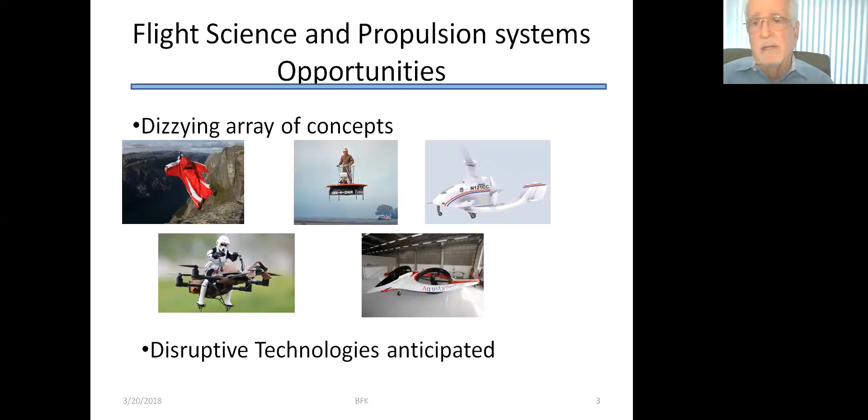The Go Fly contest really has a dizzying array of concepts. I've just put up a few here, but what I fully expect is that this contest will result in some very new disruptive technologies in the area of personal transport. But that's not what I'm going to talk about today. Instead, I'm going to discuss the nuances and pitfalls that are associated with air vehicle design and project management.

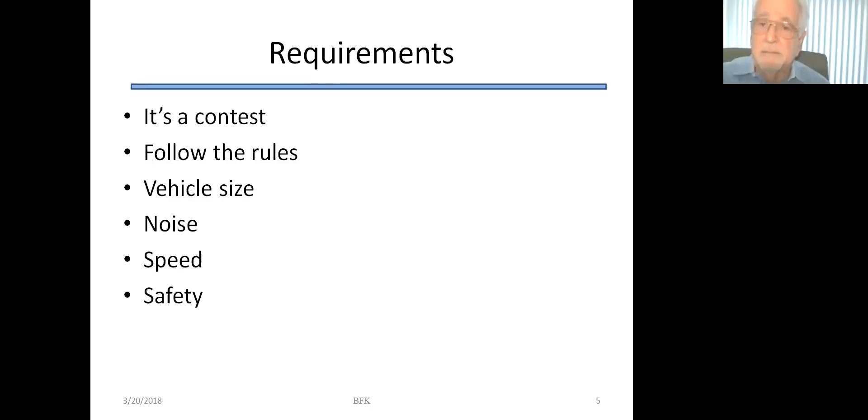Let's start with the requirements. It's a contest, so it's fundamental that you follow the rules, and the rules define the vehicle size, the noise levels, the speed, and of course, safety. The drivers for noise is a function of the lift and the propulsion system that moves you forward through the air, the power that's required, the speed, and of course, weight. And I put weight in red because that's what I'm going to be talking about, as opposed to the aeromechanics or flight science. Performance also is a function of lift, drag, power, and weight.

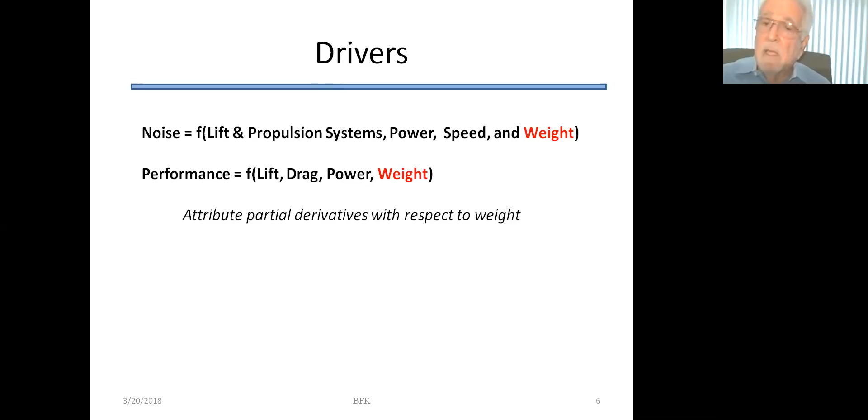I think it would be very wise to establish early on the attribute partial derivatives with respect to weight. For example, I remember working on one project and that derivative was very simple: 1 pound of weight equated to 1 foot per minute in vertical rate of climb. It's also pretty handy to develop parameter sensitivity relationships between all of the different parameters or attributes relating to one another. This will give you the knobs to turn later on as you're doing trades and you have to adjust something to meet the overall requirements. So knowing the sensitivity relationships will be very important.

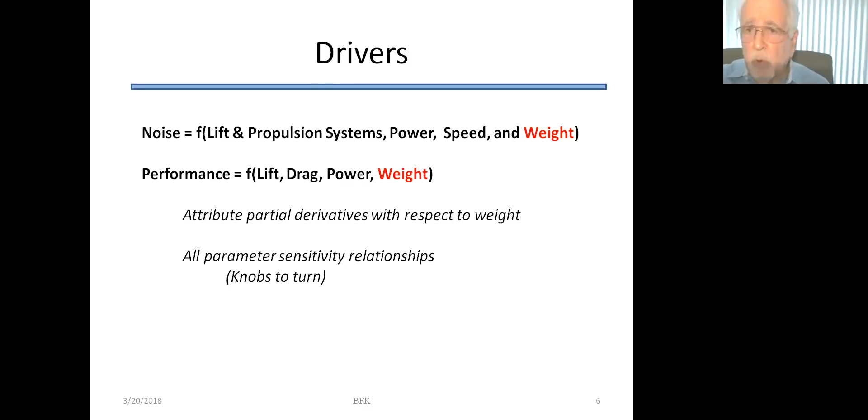This all comes down to a balanced design. What you want to do is balance the performance, which are the flight science opportunities. That's where you're going to achieve the breakthroughs, but don't lose those achievements by blowing it on weight or integration factors.

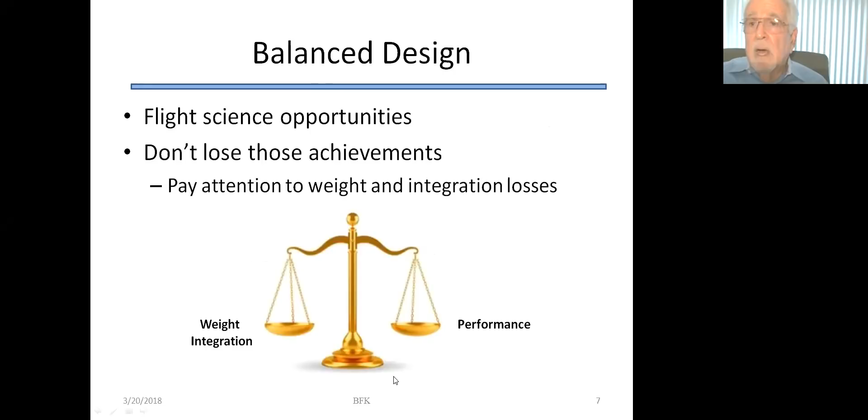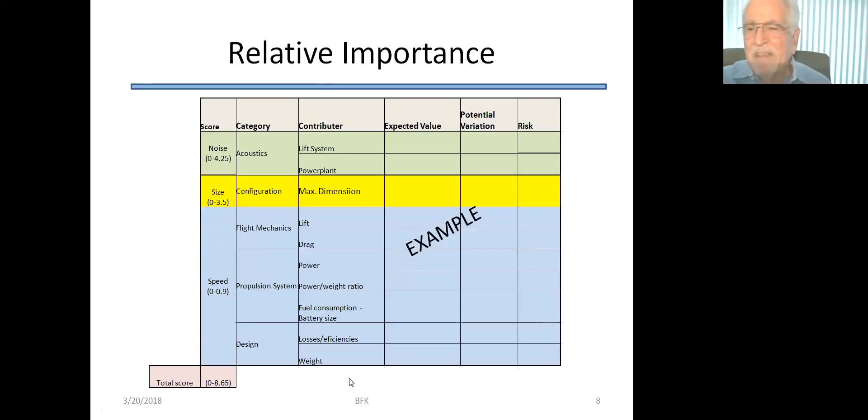Well, so I say system integration. What happens? There are system losses. The lift system, you can lose lift. You can have a perfect system, but then you have dirty air going in, or during a maneuver it stalls. So there are system losses that you have to contend with.

If you have an air-breathing engine, reciprocating or jet, there are losses associated with the air inlet and the exhaust. Gearboxes can have frictional losses. There are also temperature and altitude effects. There might be cooling requirements that can consume power or cause drag. Engines, gearboxes, electric motors generate heat. And if the pilot is in an enclosed compartment on a hot day, you might have to pry out a window, all of which causes momentum losses.

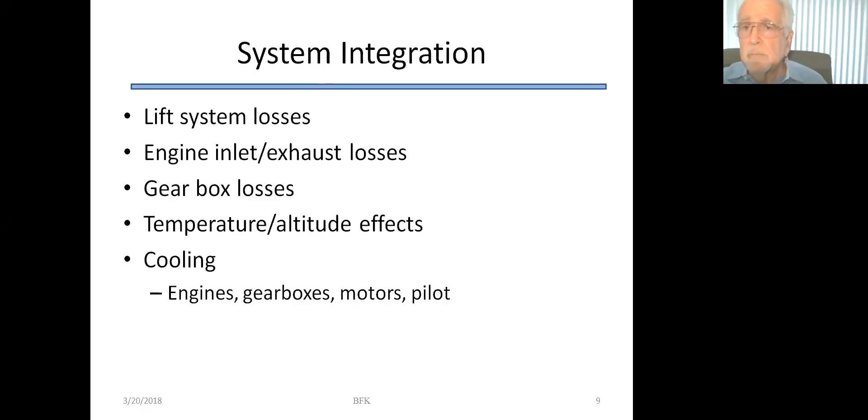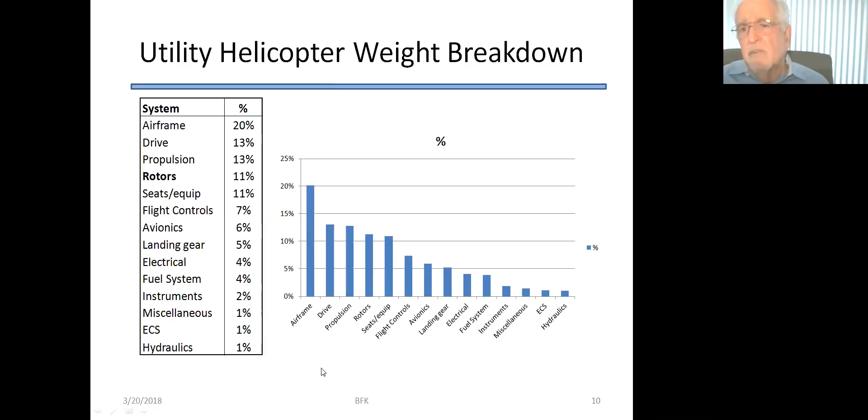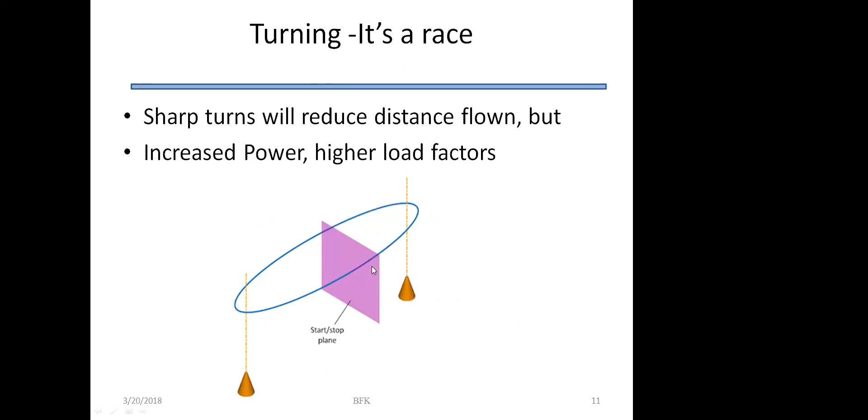Let's talk about turning. It's a race. The shortest distance between two points is a straight line, but that means you have to accelerate and decelerate and then turn around the pylon. So a more practical way is certainly an elliptical course or a circular course. But when you're making turns, increased power is required and you have higher load factors.

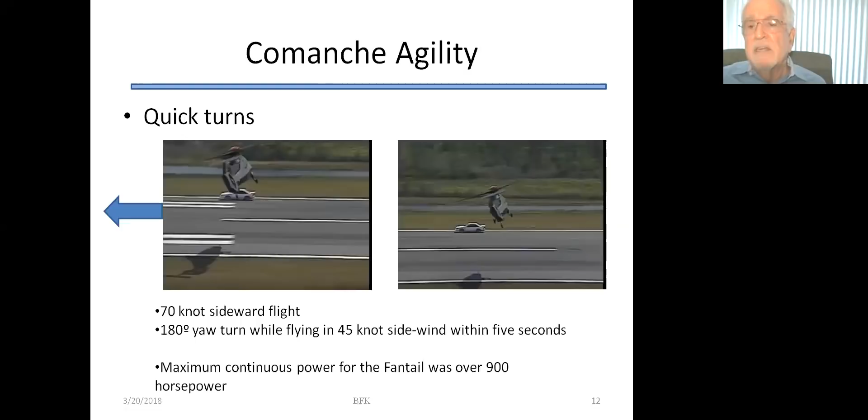The Comanche helicopter was designed for a 70-knot sideward flight. That's pretty fast, as fast as some small helicopters go in forward flight. And it had to make a 180-degree yaw turn in a 45-knot wind, which is a gale, a storm. So it moves pretty fast sideways. That's pretty nice. But the maximum continuous horsepower rating for the fantail was over 900 horsepower. So it takes a lot of power to make a sharp turn.

Loads. You're going to have to develop your own loads, all of them. They have to be developed. The flight maneuver loads, which includes turning, landing loads, both hard landing as well as

Uh-oh, I got something that says my internet connection was unstable. I hope I'm still okay.

Crash landing loads are required for safety. Things can go wrong and you need to be able to land safely when that happens. And of course you have vibratory loads, which will affect the fatigue strength of your components.

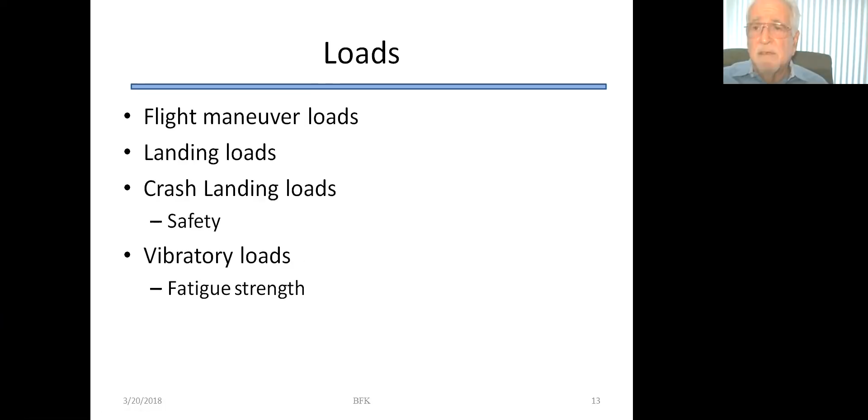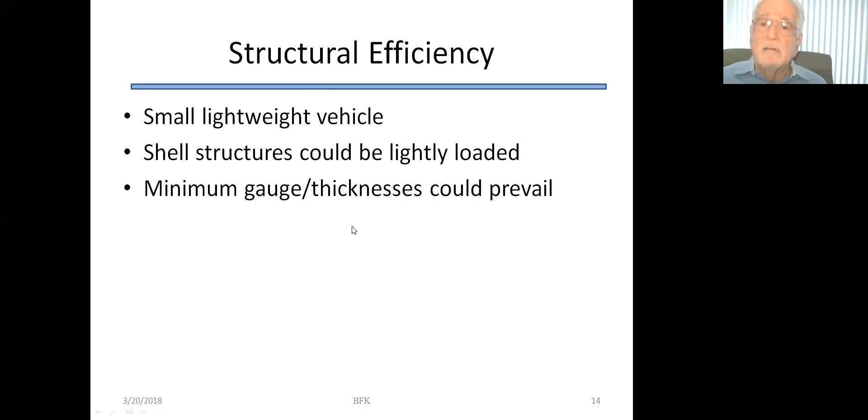I expect that this will be a small, lightweight vehicle. Shell structures, if you have them, could be very lightly loaded, and minimum gauge thicknesses could prevail. I show as an example of lightweight structures two designs that were pretty significant. The Solar Impulse flew around the world. The Gossamer Albatross, which was man-powered, flew across the English Channel. Obviously, the structure is pretty lightweight - you could see through the skin.

But very important, don't skimp on the dynamic components. The parts that are rotating, subject to fatigue, you don't want to go lightweight there. You want to make sure that those are sturdy and can hold up to the

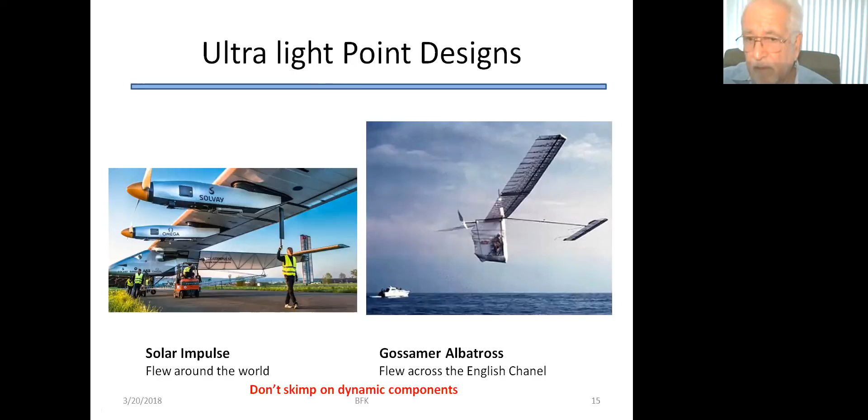fatigue loading, vibratory loads. Materials that you can use include composites, which are typically 15 to 40% lighter than metal. Graphite is the strongest and stiffest material. Kevlar is the lightest, but it's poor in compression. Fiberglass is a good general all-around material. Lightweight structural foams could be easier in a home-built situation than using honeycomb. I would still recommend metal for complex joints, and you can hybridize for efficiency.

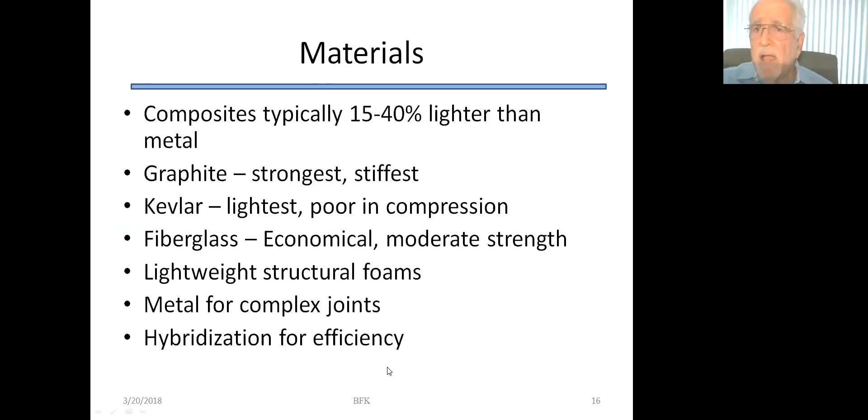If you have novel composite designs, the traditional way to validate the structural integrity is a building block approach, going from coupons, to elements, to full size.

You're probably going to use existing materials, and you should. But buying material and laying it up doesn't necessarily mean you're going to get the published mechanical properties. NCAMP, the National Center for Advanced Materials Performance, has straightforward methods for validating that when you build a part, the strength will match the values you're designing to.

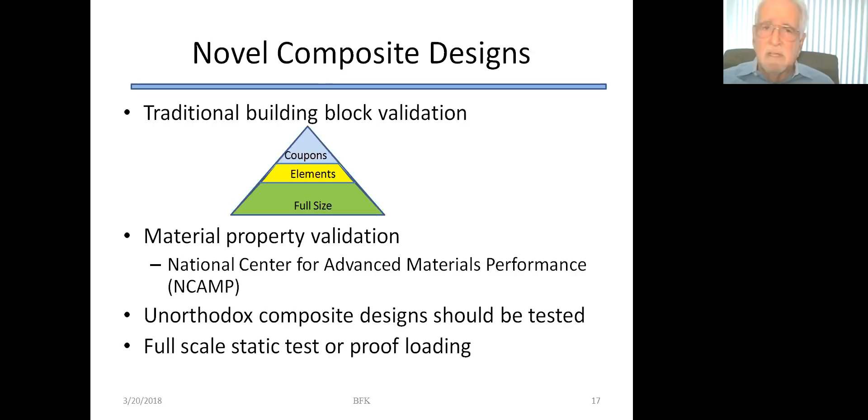Unorthodox designs should be tested, particularly designs with complex out-of-plane loading. Composites are very sensitive to that. I always recommend full-scale static or proof load testing for a composite structure, to check internal loads, since a lot of things can go wrong, and that's your real good check.

Manufacturing: if you're using a body, the streamlined shape will likely lead to composites. Composites are easier to make than aluminum or metal. Economical non-autoclave materials and processes with low cost molds, wood, or even foam should suffice for this kind of program.

If you're using adhesive bonding, use a lot of caution. Be very careful—faulty bonds that look good could get you in trouble. Quality control requirements are extremely important, involving cleanliness and surface preparation of materials. These times can expire on adhesives, so it's very important to use strict quality control when doing adhesive bonding.

Do-it-yourself construction is possible, of course. I would refer to the EAA, the Experimental Aircraft Association, for guidance. They do an awful lot of composite home-built airplanes.

Lastly, if you're going to subcontract parts to build, get your suppliers engaged early. There can be huge variations in cost between suppliers, and if you wait too long, you pay what they ask and there's no time to negotiate. So get them on board early.

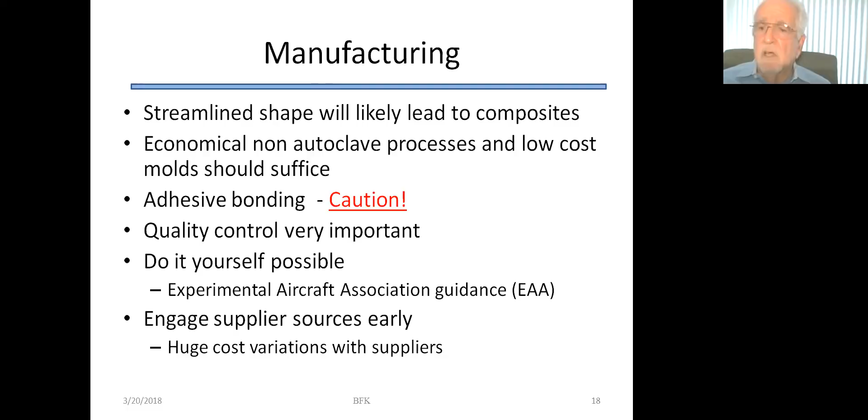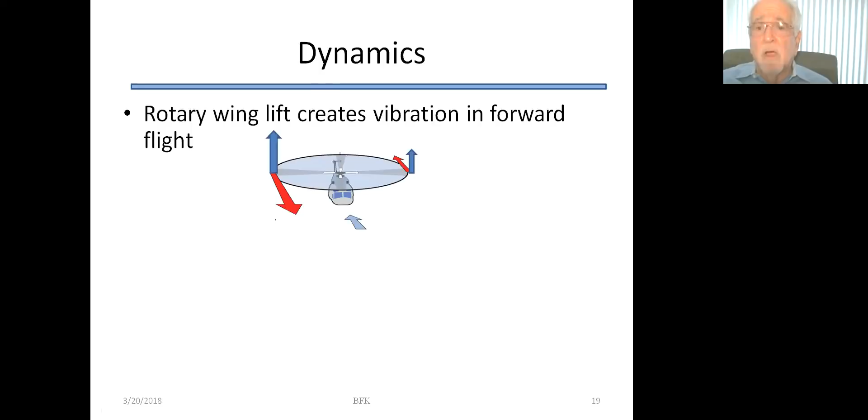Dynamics: most people know that rotary wing lift creates vibration because one rotor blade is going with the wind while the other goes against it. So on any aircraft with these lifting systems, you must avoid resonant natural frequencies. Watch out also for ground resonance, where the aircraft can rock on the ground and actually turn over—it can be a very hazardous condition.

After it's built, solutions for solving dynamic problems will be very heavy. The natural frequency equation is simply the square root of K over M, where K is stiffness and M is mass. After it's built, it's pretty hard to change the stiffness, so the typical solutions are either add material to increase stiffness—you can't decrease it—or add mass, which means carrying dead weight.

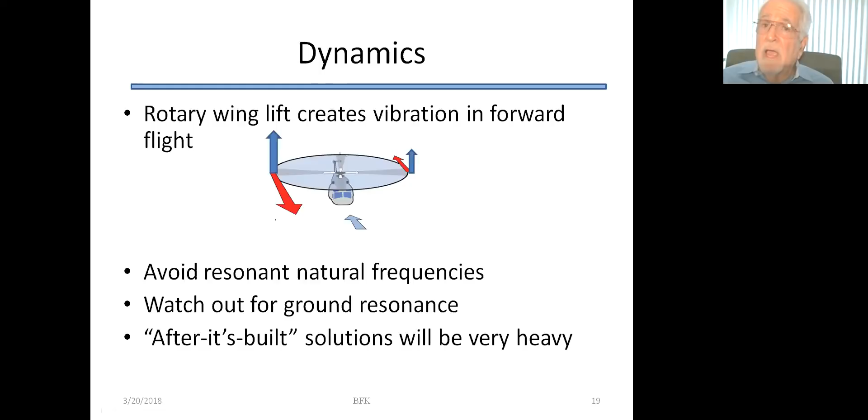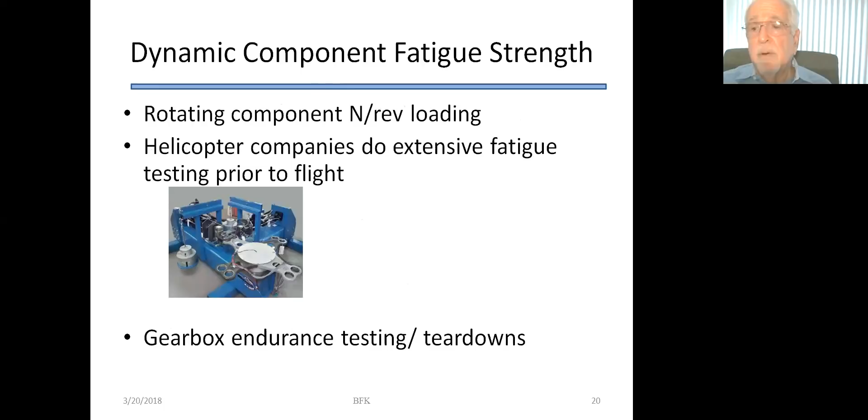Dynamic components are subject to fatigue strength. If you have rotating components with N-per-rev type loading, it's important to look at the fatigue strength. Helicopter companies do extensive fatigue testing prior to flight. They also do gearbox endurance testing and then tear down the parts to make sure there was no damage.

On the Comanche, we built a dedicated propulsion system test bed to bring out the dynamic system—the main rotor, the engines, the shafting, oil coolers, tail fan, etc. I don't expect anybody doing the Go Fly competition will go to this extreme. The alternative is simply to do tie-down tests before you're ready to fly, to make sure everything works together.

Let's talk about crashworthiness. It's important because you want to avoid injury or even worse, death. Things can go wrong in the air, and if you're coming in for a hard crash landing, you must attenuate the high impact deceleration forces. Occupant restraint is important, so you have to have a protective cocoon. High mass items—anything that weighs a lot or even a little bit—if it breaks loose and hits the pilot, it can cause injury or harm.

There must be means for egress to escape. You must prevent fires in fuel systems and fuel lines—there are techniques to prevent leakages on crash. Lithium-ion batteries have been known to become incendiary, so there needs to be protection there if you're using electrical power. And with electrical power, we now have to look at the potential for electrocution if wires carrying high voltages or high amperages are flailing around.

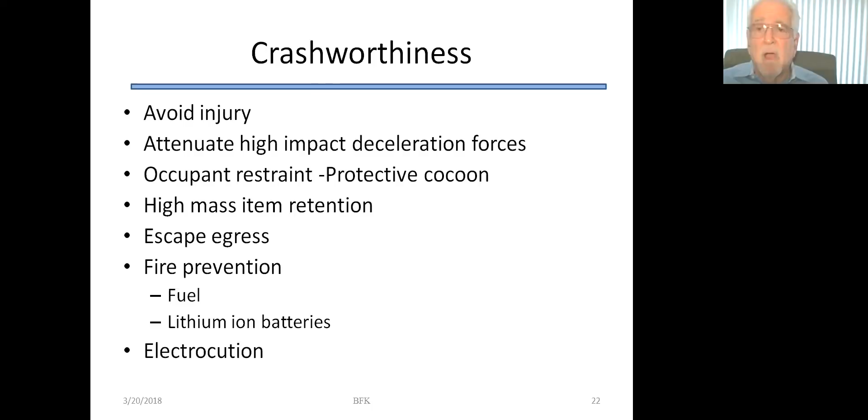The criteria for crashworthiness is mission dependent. I've worked with a number of different agencies over the years—the FAA, the Army, and the Navy—and they all have different crash criteria for certifying their aircraft. The Go Fly requirement is do not exceed 5 Gs in a crash condition, so somehow you have to make sure the pilot doesn't feel more than 5 Gs, because that's been shown to be the onset of serious injuries.

The factors that determine what the criteria should be include the speed of the aircraft and the altitude it's flying—those are the primary conditions. I'd also include auto-rotational capability: how fast could it come down if something goes wrong in flight? Certainly the flight profile and vehicle configuration all factor into what criteria you should use to design a system that does not exceed 5 Gs.

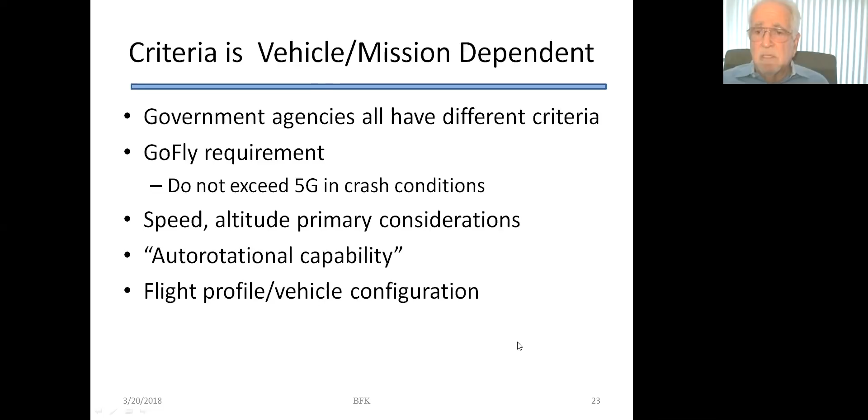Excuse me, I have to go back.

But what if it's a strap-on, where you're not climbing into an aircraft, but actually wearing the flight system on your back? That gets kind of interesting. Falling out of the sky with a couple hundred pounds on your back is interesting. I don't know what the answer is, I haven't thought about that.

The landing gear and shock absorbers absorb crash energy. Traditional helicopters use a system approach, and the order of energy absorption is based on efficiency. A landing gear has a very high load stroke efficiency curve, meaning the area under the curve is very good.

Helicopters also use stroking seats, which are controlled mechanisms to absorb high seat speed. The structure can also absorb energy, but it's usually a fallout capability. Airbags have also been used in certain applications.

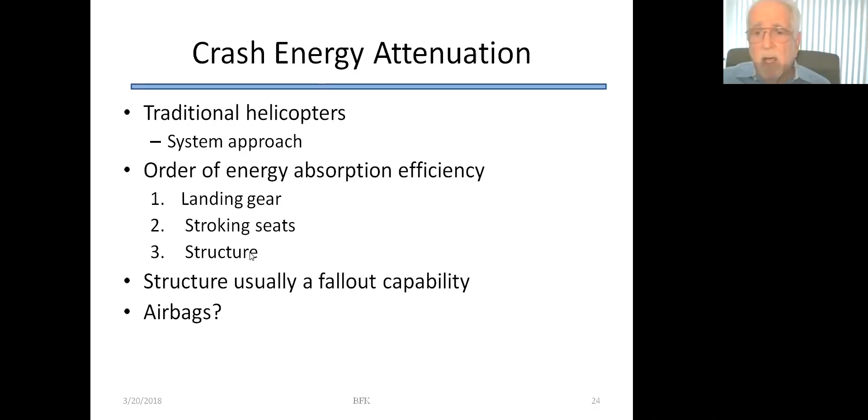Yeah, I just said, what if it's a strap-on? We talked about that. Let's talk about the landing gear.

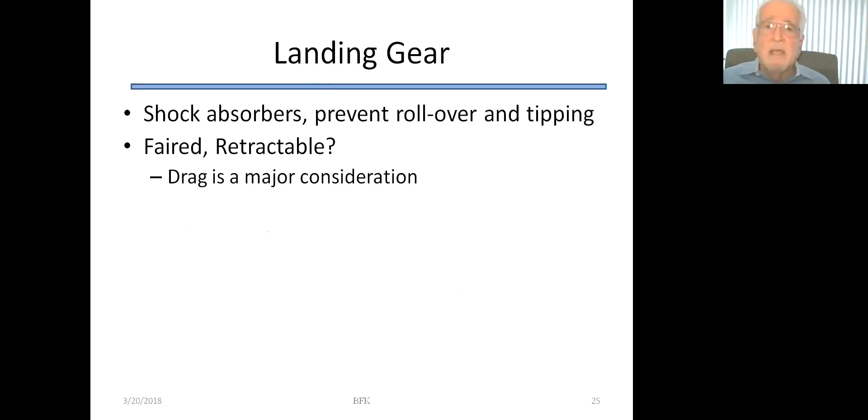Landing gear, besides being a shock absorber on the ground, prevents rollover or tipping in winds or when taking off, and any rocking back and forth due to unbalance. Should the landing gear be faired or retractable, drag is a major consideration. Bicycles, which operate at much lower speed, use streamlined helmets and faired wheels for racing. So when you're looking at landing gear, look at the drag.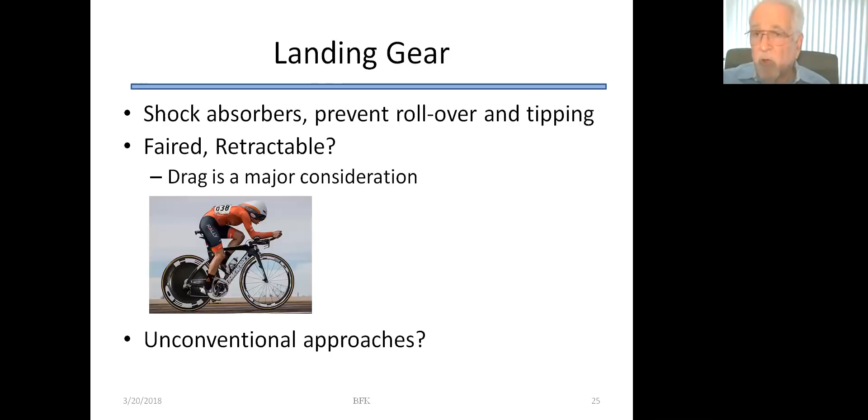I might also expect that some unconventional approaches will come out of this program. The little Hughes OH-6 was designed before the advent of formal crash requirements, and it turned out to be a very efficient aircraft for crash.

The primary structure had basically a truss type structure. The engines were mounted on the back of the truss, the pilots on the front, the rotor system on top. It went directly to the landing gear, and it performed extremely well in crashes, prior to people having to design for crash.

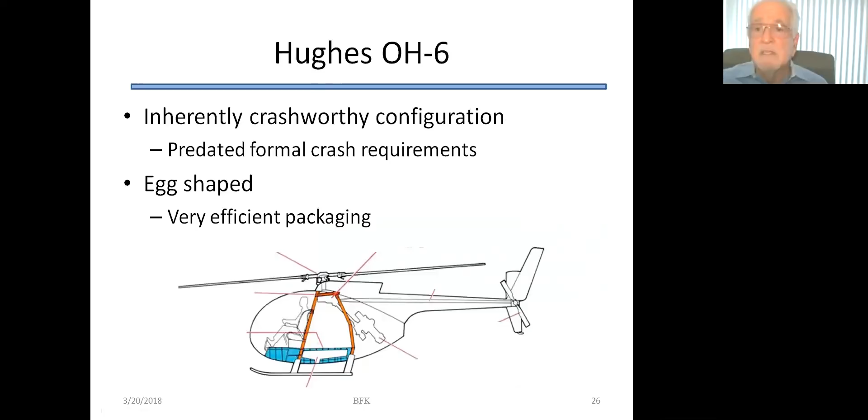Composite crashworthiness - when I was doing the ACAP helicopter, the Sikorsky S-75, the naysayers said it can't be crashworthy, how could it be crashworthy? Compare the strain energy of graphite, which goes up, snaps, and comes straight down, to aluminum. Look at the difference in areas under the curve, which is energy absorption. I said, that can't be right, we could do better than that.

So we went down in the shop, picked up some composite engine cowlings, cut them up, put them in a machine, crushed them, and got a fairly decent load stroke curve. For the actual aircraft design, we then designed more rigorous structures that could absorb energy.

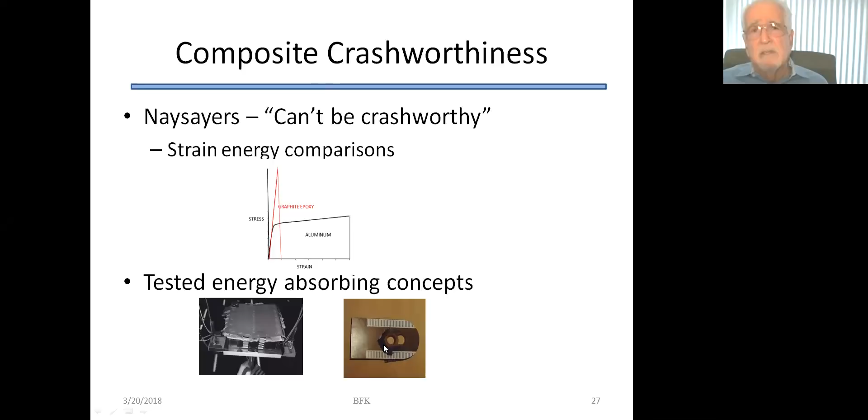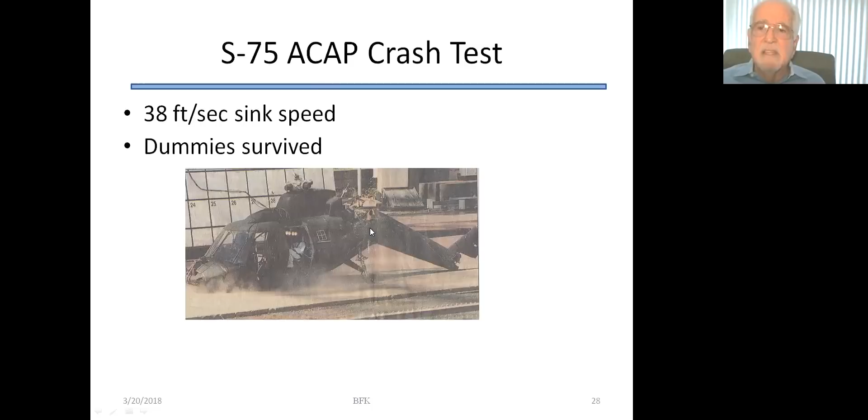Here's a crushed section of the lower fuselage, and we were able to show bearing failures absorb energy in other joints. We put that into our design, and we drop tested the ACAP helicopter at NASA Langley at 38 feet per second sink speed. The anthropomorphic dummies inside the aircraft survived the test. The tail cone broke off as intended, to reduce the sprung weight on the landing gear. So that said, composites can be crashworthy.

A few words on ducted fan performance. In order to get your performance, you need tight clearances between the blades and the duct, which means a rigid structure, otherwise you're going to hit the blades or it's going to open up. The inlet and exhaust radii are also important.

Here's a close-up of the Comanche fantail. You can see there's a nice generous radius on the back end, a sharp corner on the front end, and that was based on the inflows to the fan during flight.

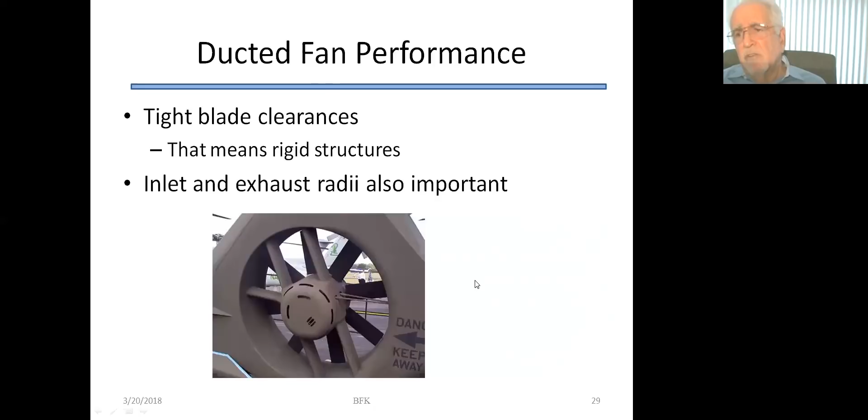Noise is caused in a helicopter by rotor blades, which are the primary source. Everybody's heard the whop whop of an approaching helicopter, that's a function of tip speed and tip configuration. For ducted fans, you have the RPM, blade numbers, and stator design have a big effect on the design.

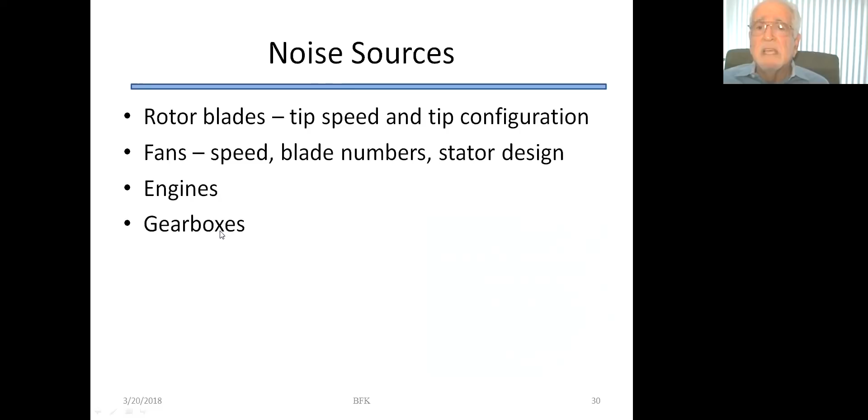As you minimize the lifting system noise, the engines and gearboxes could start dominating, so you have to really look at the whole system. Other empty weight option decisions, which you, the designers, have to decide: are you going to have wheels or skids or something else?

Flight controls, will they be fly-by-wire or simple mechanical systems? If you can't quiet the system inherently, are you going to have to put acoustic treatments on the vehicle? Do you build in engine starters or use portable devices, etc.? These are decisions you have to make and decide.

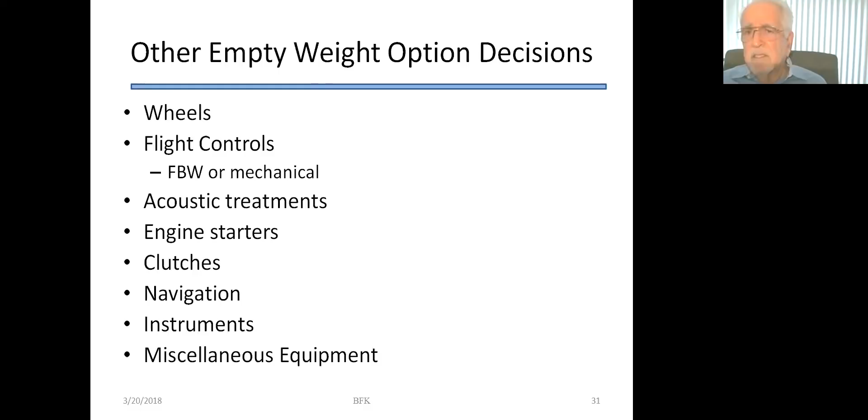Now let's move on to project management. I'm going to talk about organization, the plan, the design process, safety, risk abatement, which is very important, and weight control.

These are the skills that you need to varying degrees, but you need them all. When you start the conceptual design, you can get by with a handful of people, generalists, if you will. But as you proceed into preliminary design and detailed design, you're going to need the advice and analysis and help of specialists, because there are subtle little things that make a very big difference.

And since acoustics are the highest point value in this score, it would be a good thing to have a specialist on board or consult with somebody that really does it. Wishful thinking is not a way to achieve new attributes. There's a conundrum on all of this.

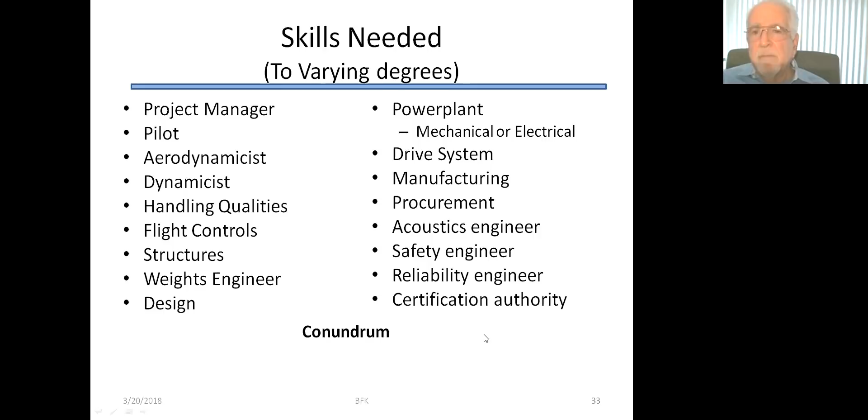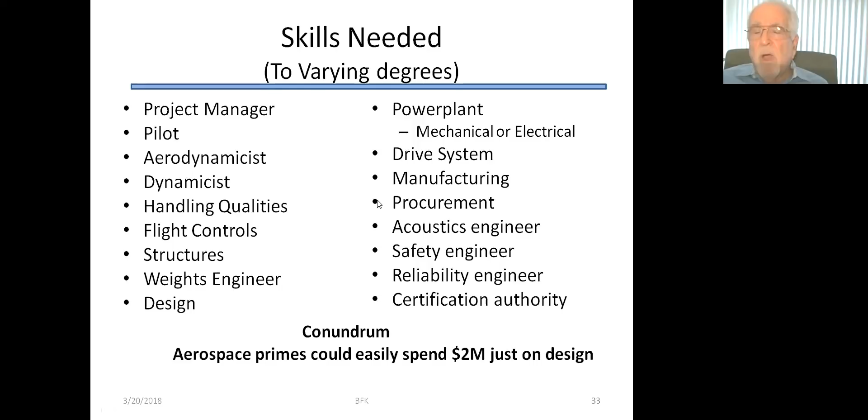The conundrum is aerospace primes, the big companies, if they were doing this, they could easily spend $2 million just on design. But let's go back in history. The Wright brothers, two guys that never even went to college, did it all by themselves. So you're going to be somewhere in between, and you have to figure out what that balance is.

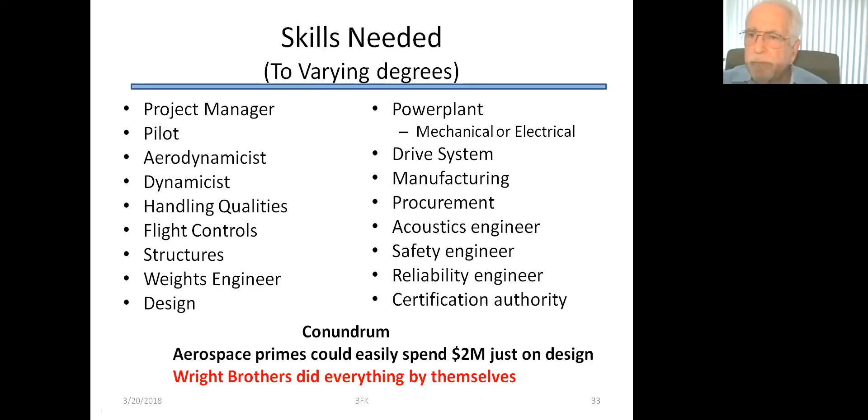Today we all use integrated product development teams. It's a small, knowledgeable team. All of your stakeholders and technical disciplines are involved, and make sure you get the expertise that you need. It's important. You make up a plan of performance. Everybody's got to buy into that plan of performance, which is what you're going to do.

Physical co-location is preferable to virtual co-location. Virtual co-location, you have latency. It takes time for things to go back and forth. People compose letters, they don't talk.

One of the most communicative programs I ever worked on, occasionally we used to put people in the basement at Sikorsky to do proposals. We crammed them in like sardines, but boy, you could communicate like crazy. You could smell a problem across the room. You knew what was going on. Management, by walking around, you just pick things up through the air, through osmosis.

You don't get that with virtual co-location. So if at all possible, I strongly recommend physical co-location.

In any case, you need standing meetings, and the standing meetings are to assign actions. You got to do this, you do that, and you come back and you report on it. You don't solve your problems in these standing meetings. You go off and do those on the sideline, but you've got to have progressive meetings to assess where you are. Problems don't get better with age. Be careful of letting things fester.

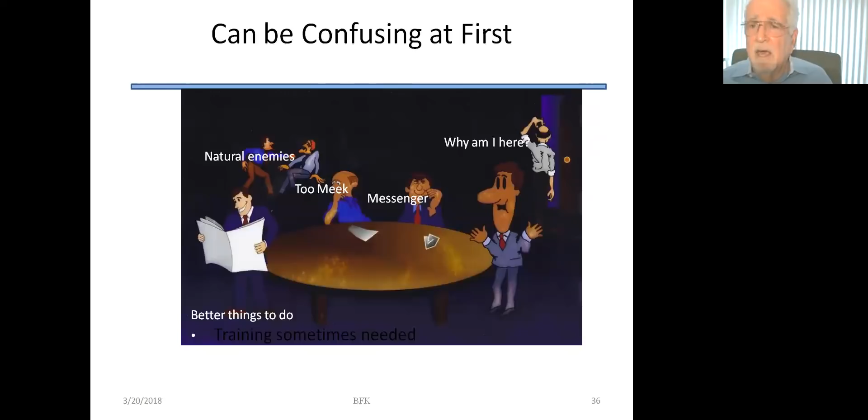But if you're drawing people that have come from large bureaucratic engineering organizations, it's a problem. On Comanche, we had to actually dedicate some training. When I say training, I don't necessarily mean send people to school, but you really want to get people to understand structured problem solving and conflict management, so you don't end up with people getting personal and getting visceral attitudes towards each other.

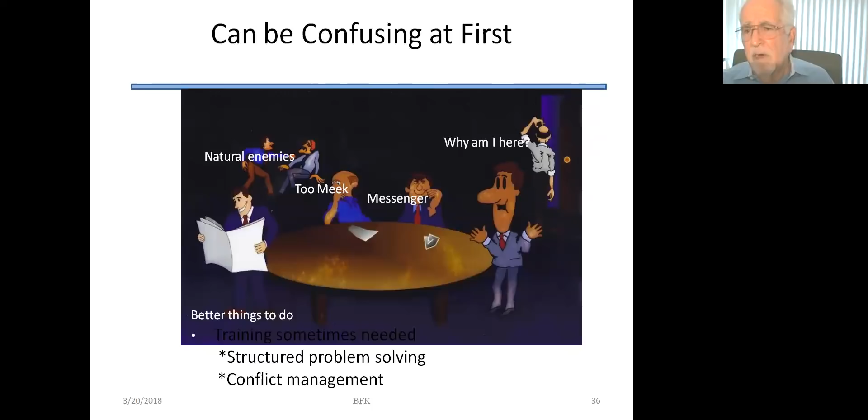So let's talk about the plan. The plan includes the research, the design, the analysis, the experiments. Very important: experiments trump analysis any day of the week, the fabrication and the test.

You start with an air vehicle specification, which are the requirements. You flow them down to the parts and systems. You need a budget and schedule. The budget and schedule must identify the resources.

Engineers hate schedules. They do. They say, leave me alone, let me just do my thing. I'm sorry, you need a budget and schedule. Otherwise, you're going to wake up one day and you're going to be out of time. Time is your enemy. So you must manage your budget and schedule religiously. It's a fact of life.

What do I mean by a surge capability? There comes a point where suddenly you're going to find, as you get to the short strokes, you're working 24/7, 80, 100 hours a week. So if you start out that way, or if you're counting on that—or if you're not counting on that—that's why it's important to manage the schedule, because eventually you get to a point where there's not enough time to do the work. You just can't fit it in.

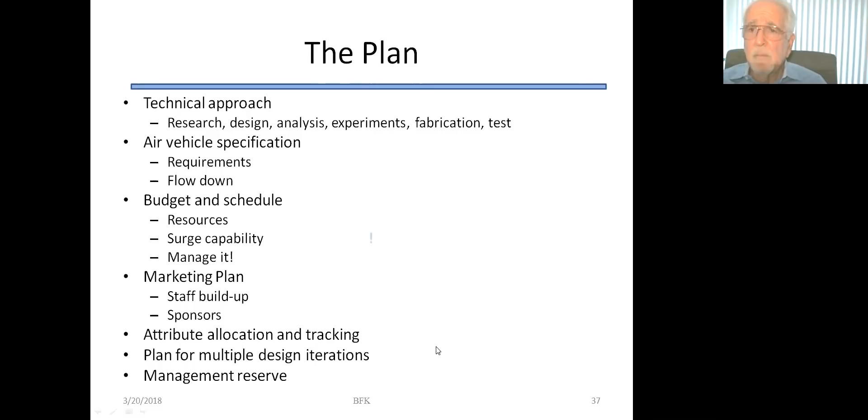So the first step is research. You want to gather data from existing small V/STOL aircraft—look at the performance, the weight, power. Why do you do this? Because you need it for the preliminary design parametrics. You want to do sanity checks against your calculations. You'd like to do competitive assessments. If you're doing something that other people have done and you're doing the same thing, you're not going to win. So it's important to gather the data on what's been done so far, and develop some parametrics.

Synthesis is going to be necessary because it's going to be very nonlinear. I don't think you're going to find what you're doing because nobody's done it yet. And parametrics are a lot easier to use to conduct trade-offs than doing bottoms-up design.

Lastly, review the FARs, the Federal Aviation Regulations. The FAA has to grant you an airworthiness certificate, but more importantly, you want to look at those regulations because within there, there's a lot of relevant rules and design practices. I'll bet that when you look at it, if you haven't, you'll say, oh, I didn't know that, but you do need to know that. And they deal with safety, of course.

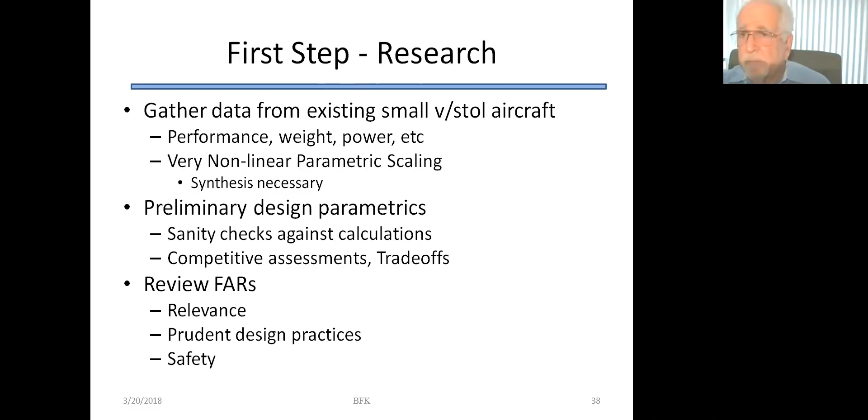You then go to make your general arrangement drawing, a simple general arrangement drawing, inboard profile for packaging.

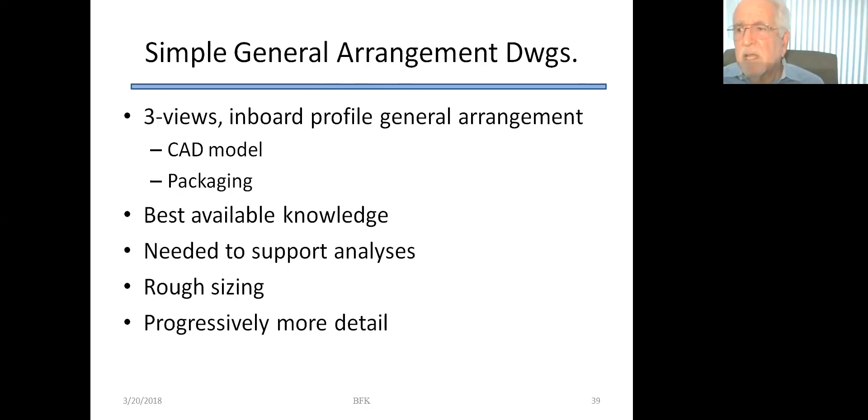You start out with your best available knowledge. You're not going to know everything, but just make the drawing. It's needed to support your analysis. You do your rough sizing. It's one thing to say, well, parametrically this works, but I don't think you have parametrics. So volume times density tells you what the part weighs.

Safety. A number of speakers have already talked about FMECAs, failure modes and criticality analysis. Can the part fail? If so, how? And is that critical? Crashworthiness, I've talked about. Single point failures, you certainly want to minimize that. How do you avoid hazardous single point failures?

You need backup emergency power, redundancy, fail safe, safe life. Safe life is like for dynamic components, conservatively you might design to keep the stresses below the fatigue endurance limit to get a very strong design. Right now, people are focusing probably on the air vehicle, but pay attention to the flight controls. Single point failures there can be catastrophic. If you have no control over the aircraft, it's going to crash.

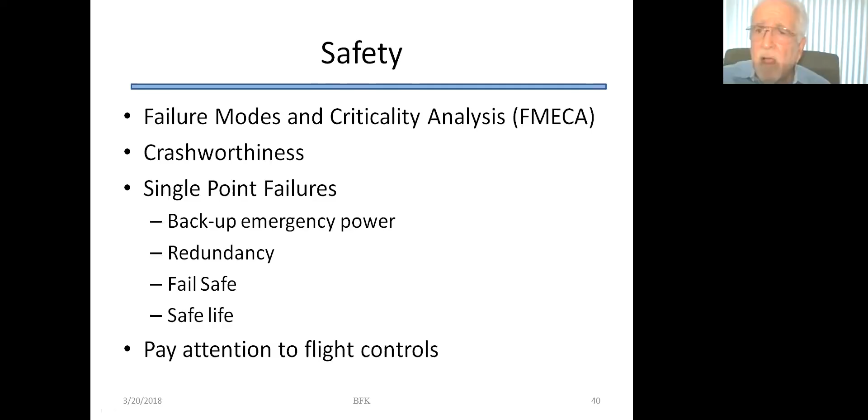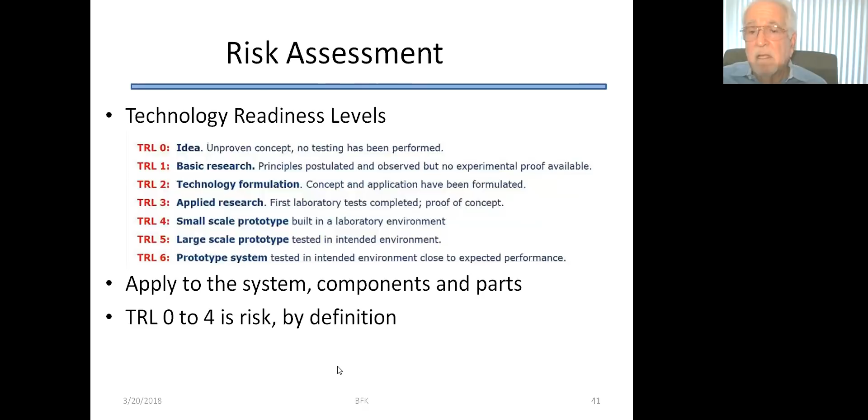Risk assessment. For a number of years now, people have been using technology readiness levels to define risk. TRL 0 is an idea, and TRL 5 and 6 is where you're going. You want to apply this concept to the system, the components, and the parts. By definition, TRL 0 to 4 is risk, and that's where you guys are, because otherwise it's been done and there'd be no contest. TRL 5 or 6 is where you're heading. I don't believe that anybody has mature technologies that currently meet the GoFly criteria.

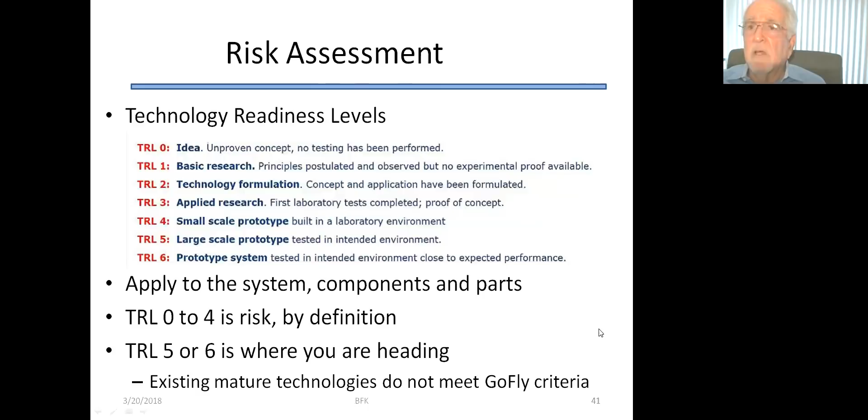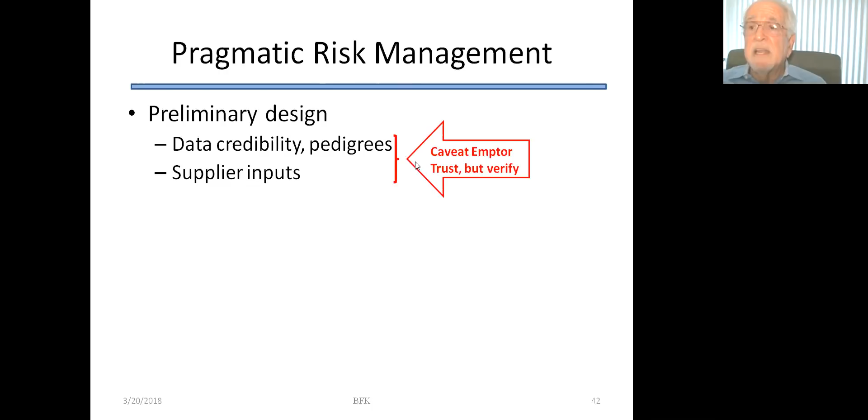Pragmatic risk management. During preliminary design, you have data. You want to know the credibility of the data, and you'll have supplier inputs. So caveat emptor. As you get this data, trust but verify. You have tried and true versus novel approaches. The novel approaches, experiments and tests are the best means of validating that your approaches work. Have backup plans with alternative designs.

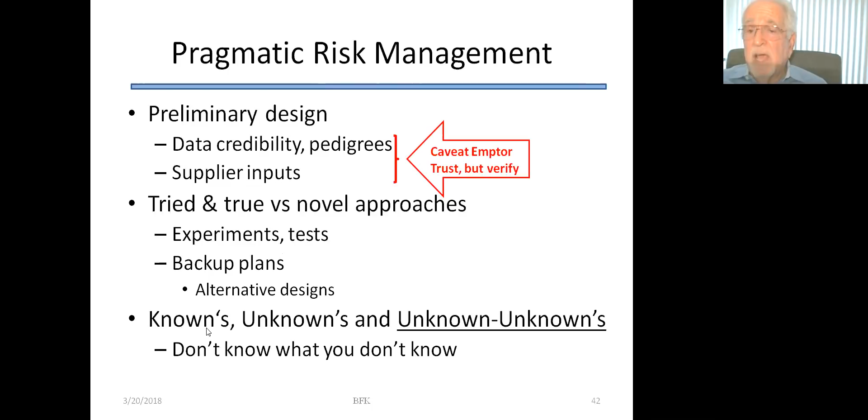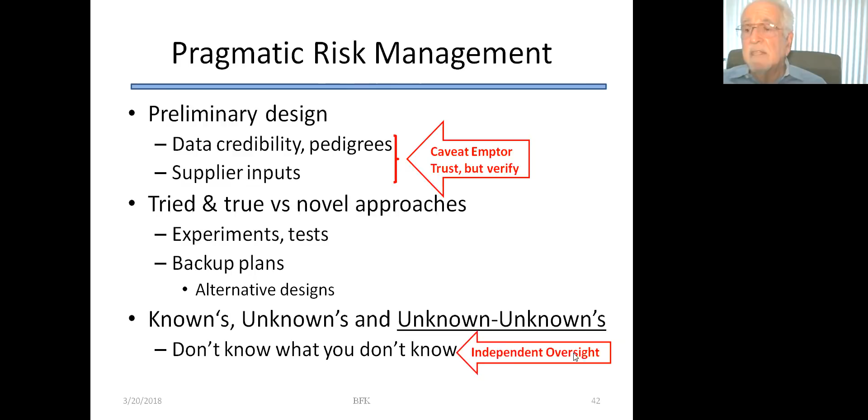Watch out for, there are knowns, there are unknowns, and then there are unknown unknowns. You don't know what you don't know. How do you handle that? Independent oversight. I suggest that you have preliminary and critical design reviews. Preliminary design is right prior to starting detailed design, and critical design review is before you build the aircraft. Non-advocate deep dives are very important, and you have peer reviews.

I want to just divert for a second, a war story. I said I would talk about agonies of defeat.

There was one project where we were developing a new manufacturing structural design concept. We went through the building block approach. My structures engineers signed off on it. They showed it to me. I said, yeah, that looks good. Let's go ahead. We had critical design review, which was perfunctory, but a lot of people were there. Government was there. Everybody said, yeah, go ahead, build it. They built it, tested it, and it failed catastrophically.

This bothered me tremendously. I said, what could I have done differently? We followed the book. The only thing I could think of that I could have done differently was to call in another peer, somebody that I respected, because once we looked at the failure, we said, oh yeah, in hindsight it was easy, obvious. But if I would have had another peer, independent, non-advocate, coming in off the street so to speak, to look at it, I think we would have succeeded and could have fixed it and not had a failure. So who do you get for the peer review?

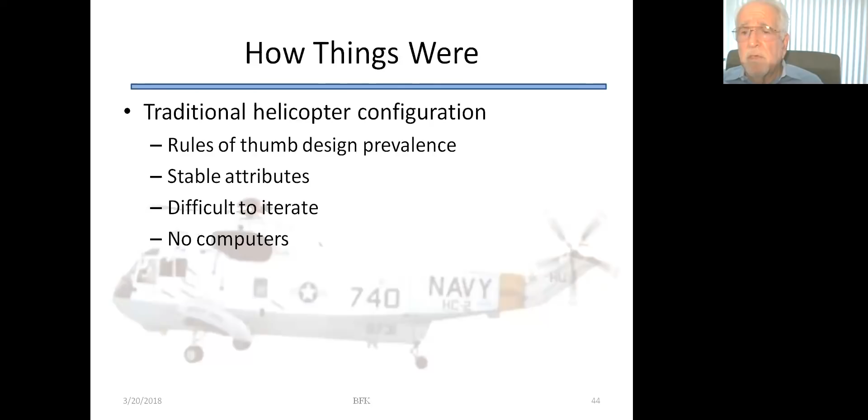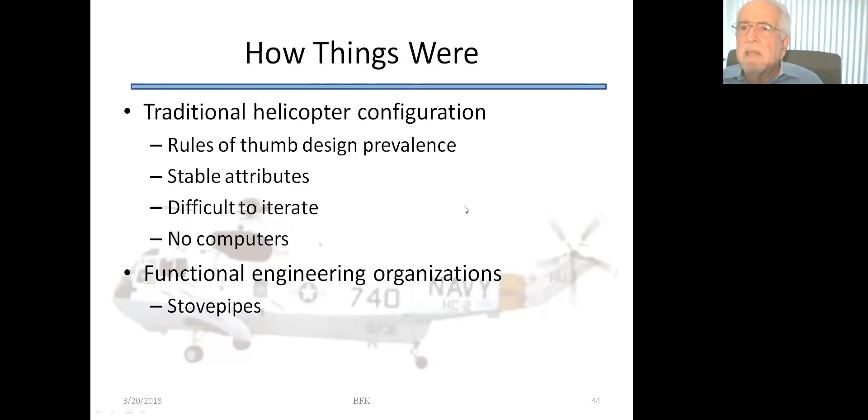Once it came out of preliminary design, the loft lines, for example, were scribed literally into big aluminum plates, and you traced them from the plates. It was very difficult to iterate. There were no computers, so you had functional engineers that were basically stovepipes. They just bent their heads down and did their thing. The next aircraft was the Blackhawk, the H-60.

That had significant but incremental improvements. To handle those improvements, the parametrics for weight and performance were adjusted very carefully with technology adjustment factors. That aircraft actually, the prototypes came in underweight.

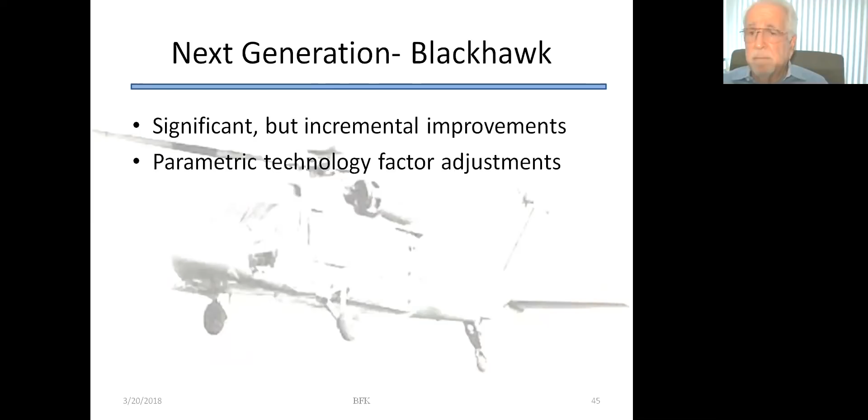It had new crashworthy requirements, and for that we hired a crashworthiness consultant - I still remember him - Dr. James Turnbow from Arizona State University. He was the guy that wrote the design criteria for the Army, and he helped us immensely.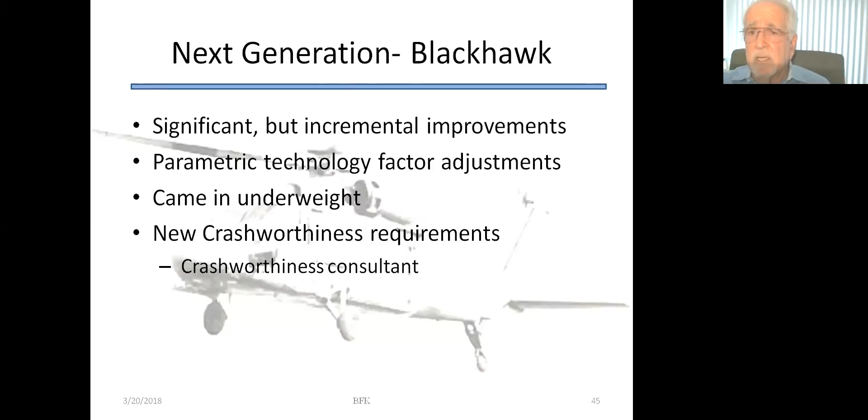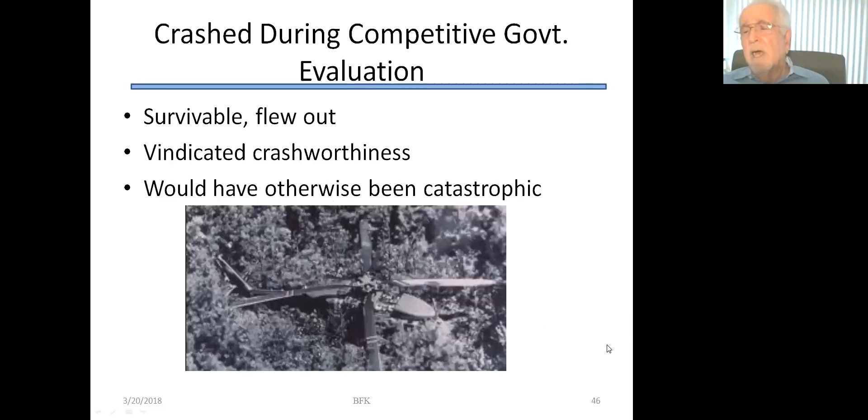What happened - and it was a good thing - during the competitive fly-off against the Boeing UTTAS, the helicopter had to make a crash landing in a forest. It was survivable, everybody left the aircraft. It damaged the trailing edge pockets of the blade, and it flew out within a couple of days after they chopped down some of the trees. It would have otherwise been catastrophic. So things happen, and prepare for it.

The last aircraft I want to talk about is the Comanche. It was a very advanced, sophisticated helicopter, the most advanced, sophisticated helicopter ever built. It was done with integrated product development teams, computerized designs.

I remember when we were starting design, the program manager came to me and said, hey Bruce, you got all these fast computers, are you going to do it faster? You know what happened? No, you didn't do it faster, you did it better. You did more designs, more iterations, but be careful - you can go crazy with computers and finite element models. People go overboard with elements and it takes forever to run. You got to be a little practical with that, but computers have really come a long way.

It had extensive, challenging, often conflicting performance and technical requirements: high speed, high maneuverability, low radar, low IR signature, internal retractable weapons, packed with avionics. It was very complex, difficult to predict interactions, and there was requirements creep. Be careful of requirements creep - that's where you say, oh, we can make it better by adding this. Yeah, you never get done.

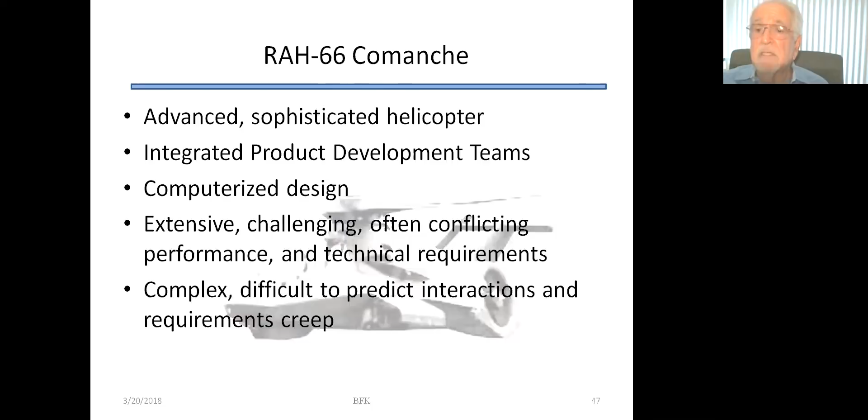That aircraft had an ongoing weight closure battle. When the program was canceled for other reasons, there still were weight problems. So here's where you're going to end up: depending on your payload fraction, you're going to be somewhere between empty weight, 200 to 800 pounds, and you got to fit all of this stuff in.

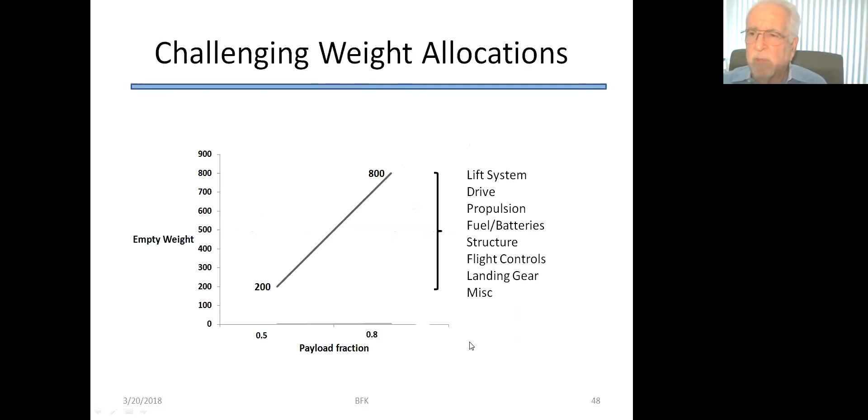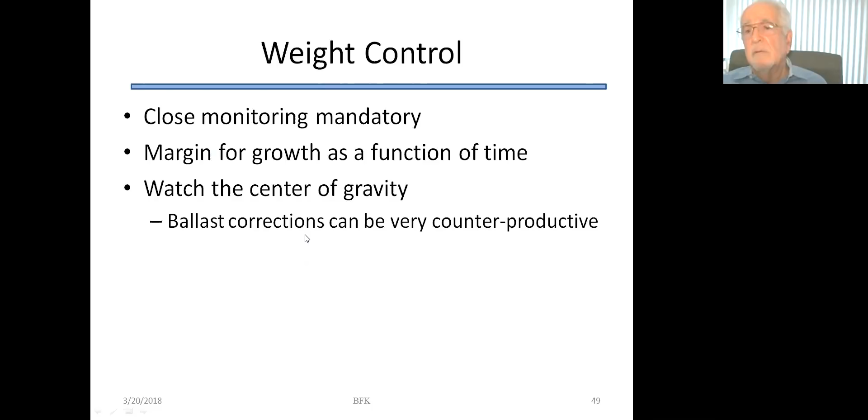That goes back to my first couple of charts where you lay out what the actual weights will be. Weight control is important. Close monitoring is mandatory. Provide a margin for growth as a function of time. Watch the center of gravity - ballast corrections, if you have to do them to balance the aircraft, can be very counterproductive.

So, in summary: pay attention to all your attributes, go for a balanced design, make a good plan. Be realistic, knowing what you know and what you don't know, and get help when needed.

I have one more slide. I was extremely inspired by the Olympics closing ceremony, where they took a mass of 300 little UAVs and flew them into the Olympic symbol, and did some other displays. To me, that says Intel and companies like that are well on the way to developing an infrastructure that could handle personal transport. So it's up to you guys now to develop the personal vehicles. Good luck, and I'm now open to questions. Thank you.